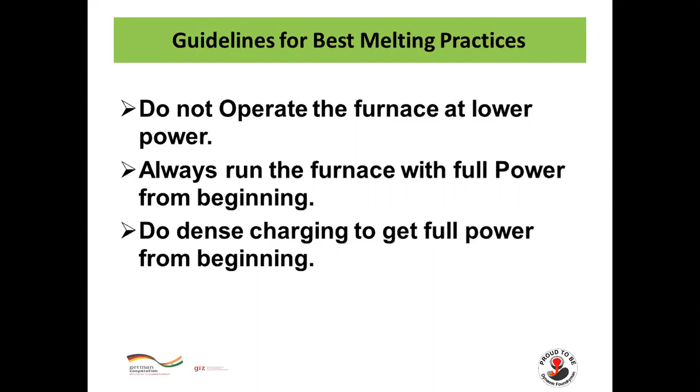Do not operate the furnace at lower power. Always run the furnace with full power from the beginning. Do dense charging to get full power from the beginning, drawn right from the first minute.

Write down the power meter reading before the start of a new heat so that you can understand your last heat's timing and power consumption. Why does the furnace not get full power?

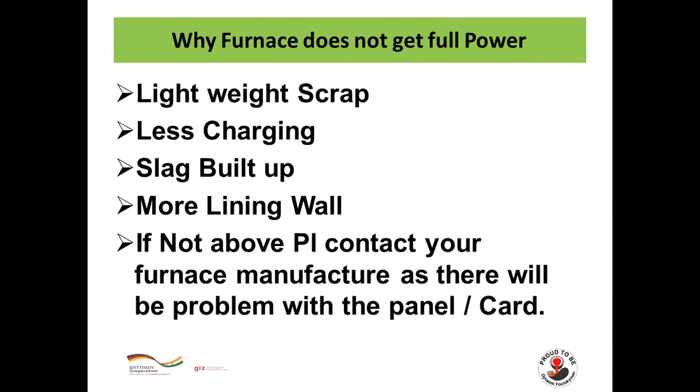Lightweight scrap, less charging, slag build-up, more lining wall. If not any of the above, please contact your furnace manufacturer as there will be a problem with the panel or card.

Guideline for the best melting practices: weigh 100% of material before charging. It will help you avoid late additions, and this will help reduce melting time and power consumption.

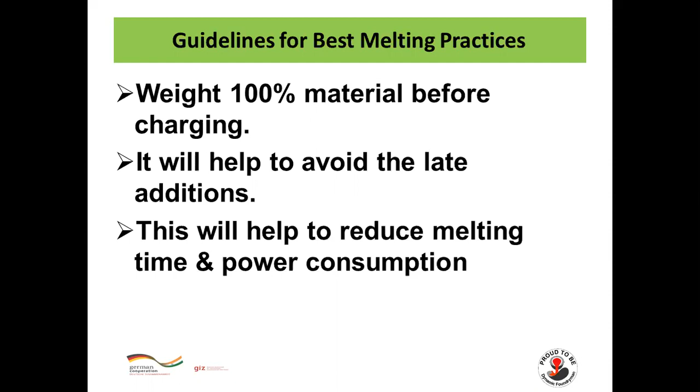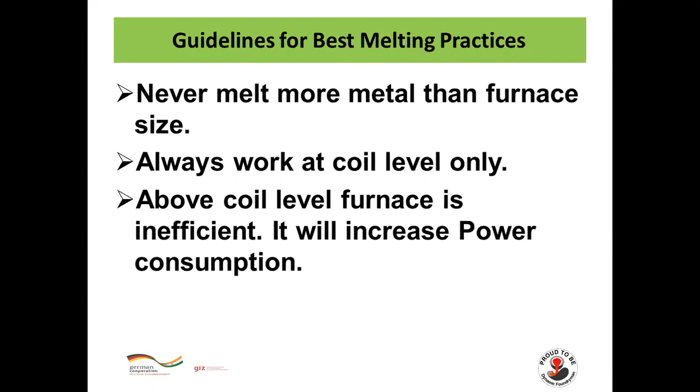Always work at coil level only. Above coil level, the furnace is inefficient and it will increase power consumption.

Study energy bills carefully before paying so that you will be able to make improvements to reduce power cost.

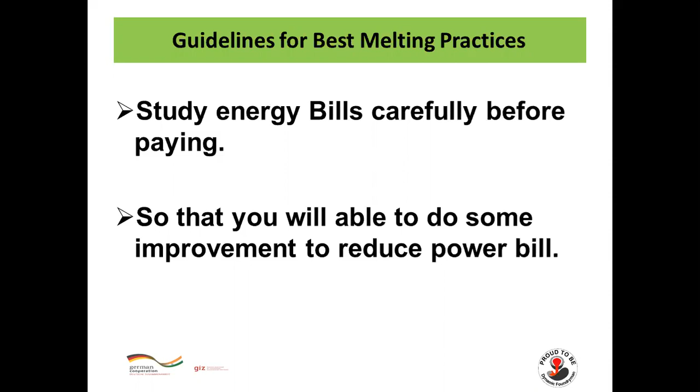Avoid often cold-starting the furnace. A cold start heat should take not more than 10 to 15% extra time.

Cool the furnace faster after shutdown with the help of a fan. This will give small cracks rather than bigger cracks, which are more dangerous.

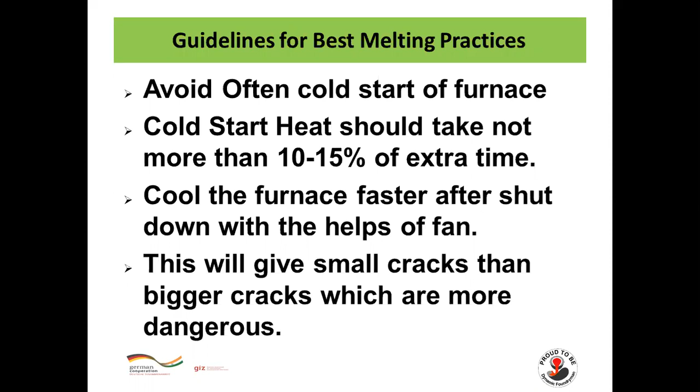Less lining life and more sintering heats will increase your power consumption and thus your power bill. So follow good practices in lining and sintering process.

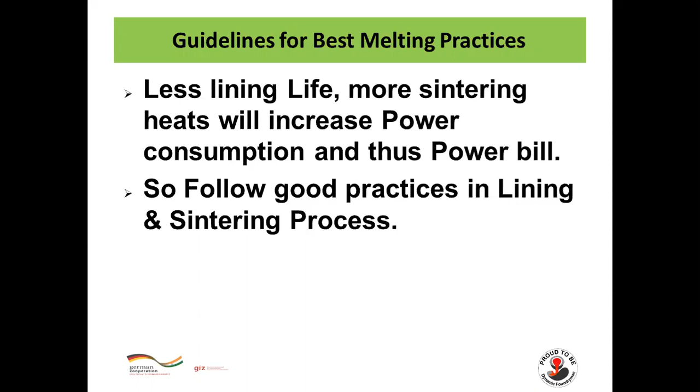Do not keep the furnace open during melting. Provide a Cerawool cover. Always cover the ladle with a Cerawool cover to reduce temperature drop, which will help reduce tapping

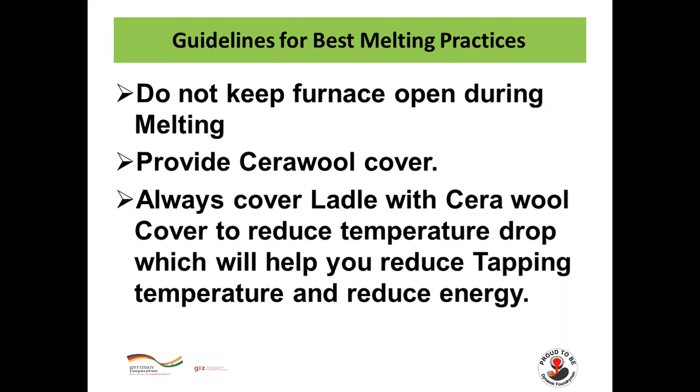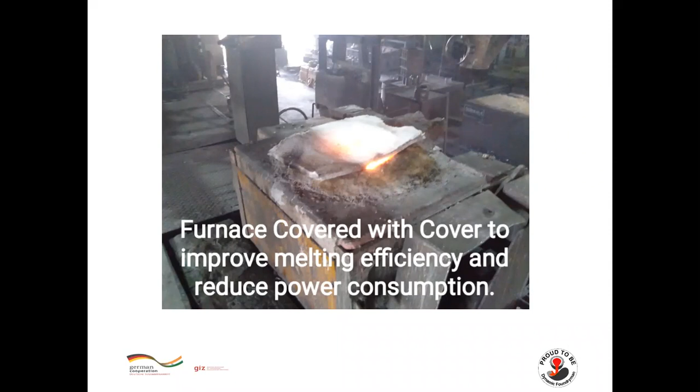Holding of the furnace happens due to breakdowns, no manpower during lunchtime or shift change, scrap and other material not available on the platform, low manpower, or molds not ready. These are the various reasons the furnace gets held.

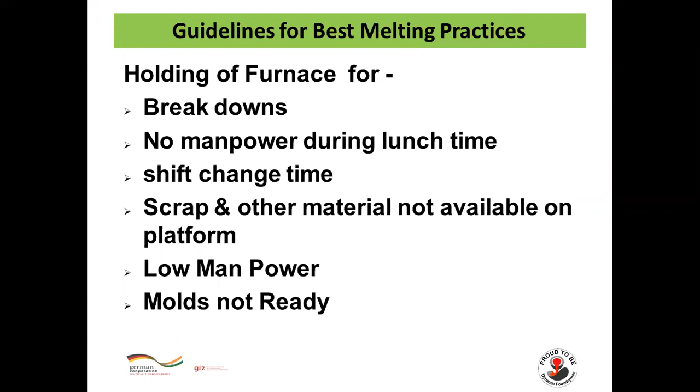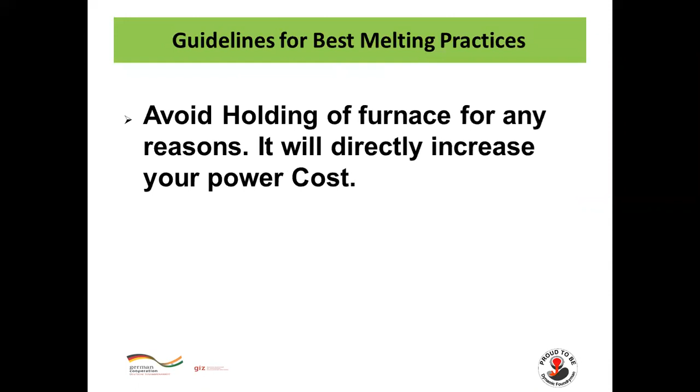You have to avoid these reasons because holding the furnace for any reason will directly increase your power cost and power consumption.

Use a preheated ladle for reducing power consumption. To maintain the ladle red hot, keep Cerawool on the ladles after pouring.

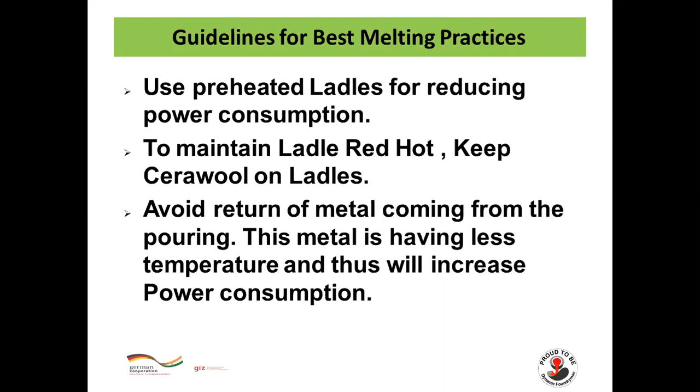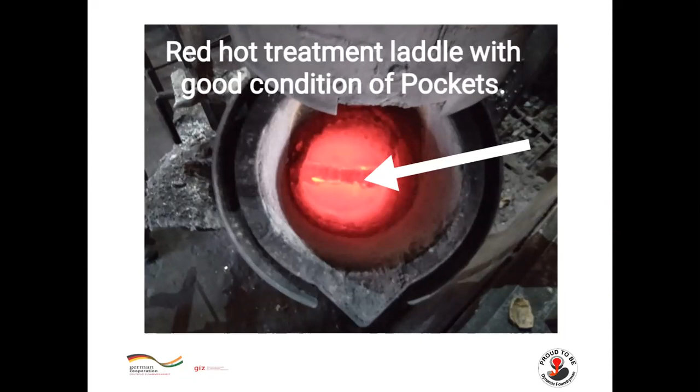You can see a red hot treatment ladle with good condition of pockets, so that your tapping temperature and power consumption will be reduced.

This is the way you can use ladle preheaters also for heating the ladles, either by preheating with preheaters or by metal.

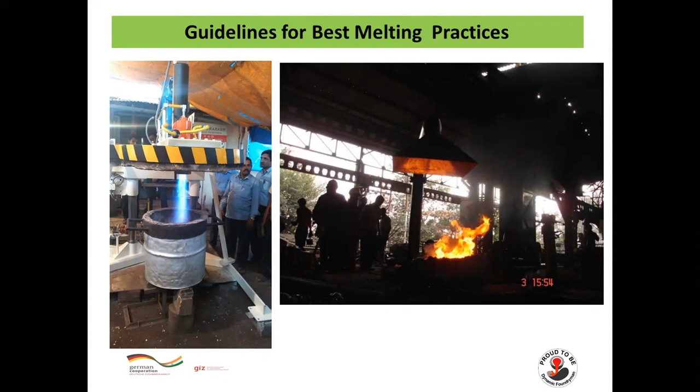Use shot-blasted or tumbled runner risers. Black runner risers with sand will increase your power consumption and also reduce lining life.

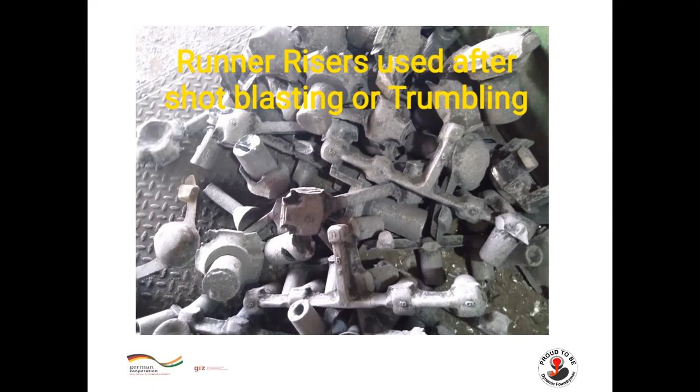This is the picture for runner riser used after shot blasting and tumbling. It is preferred to use this kind of tumbled or shot-blasted runner riser to reduce your power consumption.

Use glass scrap or a furnace cleaning agent periodically to avoid slag build-up in the furnace. Slag build-up will reduce

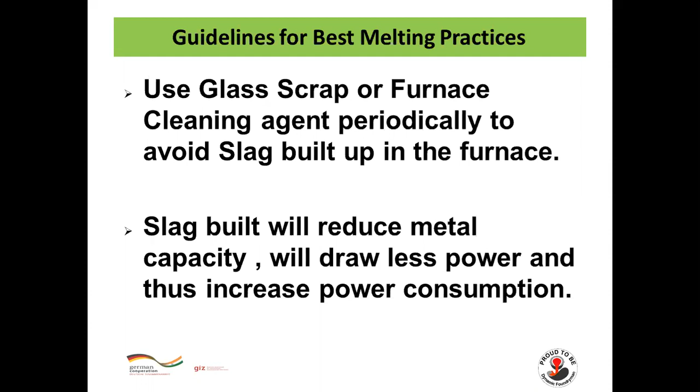metal capacity and will draw less power and thus increase power consumption. So it is very important to keep the furnace clean and slag-free.

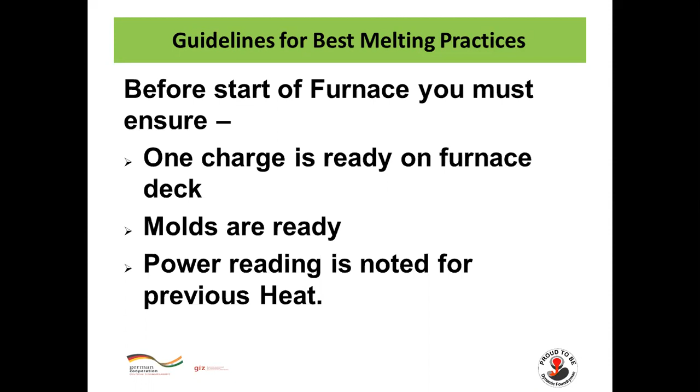Before starting the furnace, you must ensure one charge is ready on the furnace deck, molds are ready, and the power reading is noted for the previous heat. This picture shows one full charge ready with scrap and

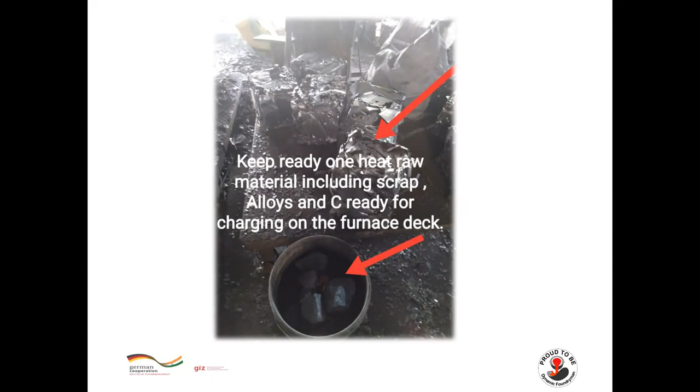alloys on the furnace deck, so that you can immediately put that scrap into the furnace after tapping, and so that you can get full power from the beginning.

Always keep 20 to 25 kgs of MS or CRCA aside to avoid late addition of coke, as late addition of coke takes more melting time and gives erratic results, and most importantly it will hold your furnace and your power consumption will go up.

Slogan: always prefer to add CRCA, do not add carbon at the end as a late addition. Keep some CRCA aside to maintain carbon percentage as per expectation.

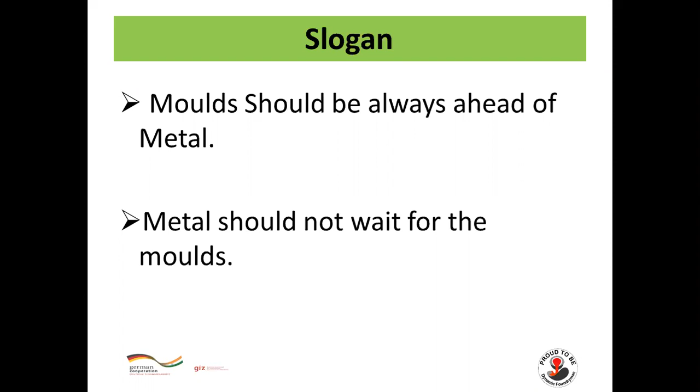Molds should always be ahead of metal. Metal should not wait for molds.

These are 4 case studies I have shared with you showing the power consumption of the furnace: 350, 325, 300 and 275 units per heat. If you consider benchmarking, then 25 units extra will cost you about 238 rupees per heat.

If you consider 44 heats per day of 500 kgs, it will save you more than 10,000 rupees per day, which will be around 2,50,000 rupees per month — a huge saving just by saving 25 units per heat.

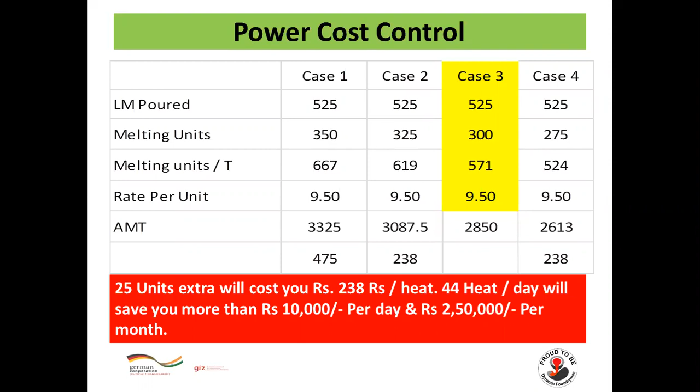Thumb rule for melting power: power of furnace in kW multiplied by 2 will be the melt rate in kgs per hour. So a 500 kW furnace will give you around 900 kgs to 1 ton of liquid metal per hour.

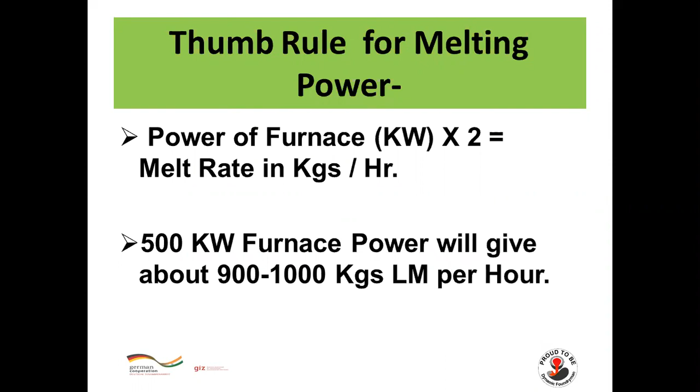Keep that thumb rule in mind and try to achieve it so that you can get better power consumption. Thank you very much for your patient hearing. Thank you.